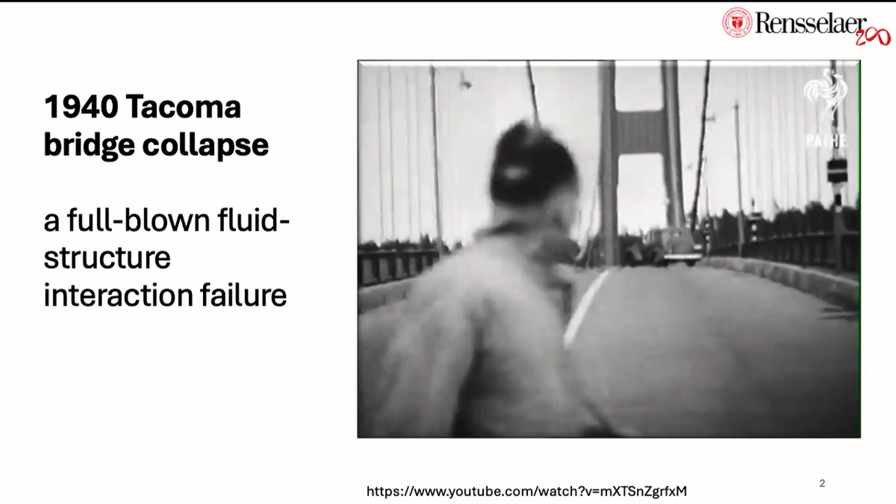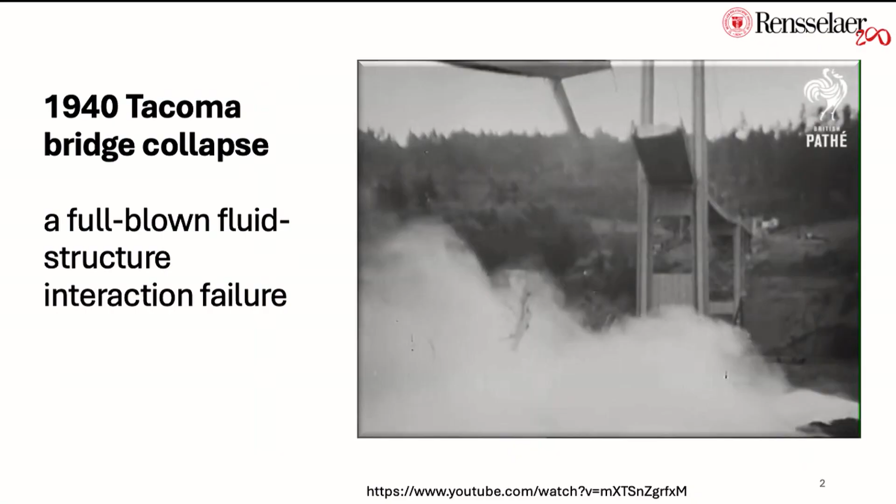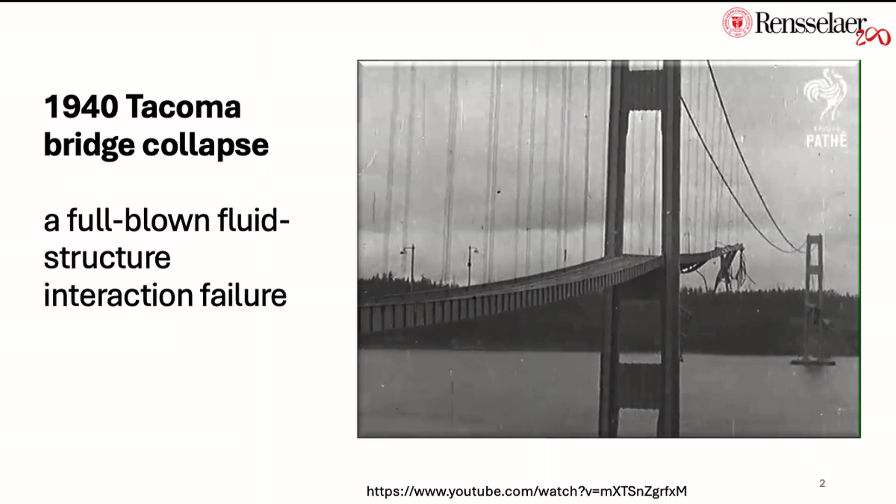many of you, I'm sure, know about the 1940 Tacoma Bridge collapse, and this is a full-blown fluid structure interaction failure. And if you know how this all fell apart, you will see it's instability problems, vibration problems, structural failure problems. So, this is a typical example of our everyday life, what we could encounter in fluid structure interactions.

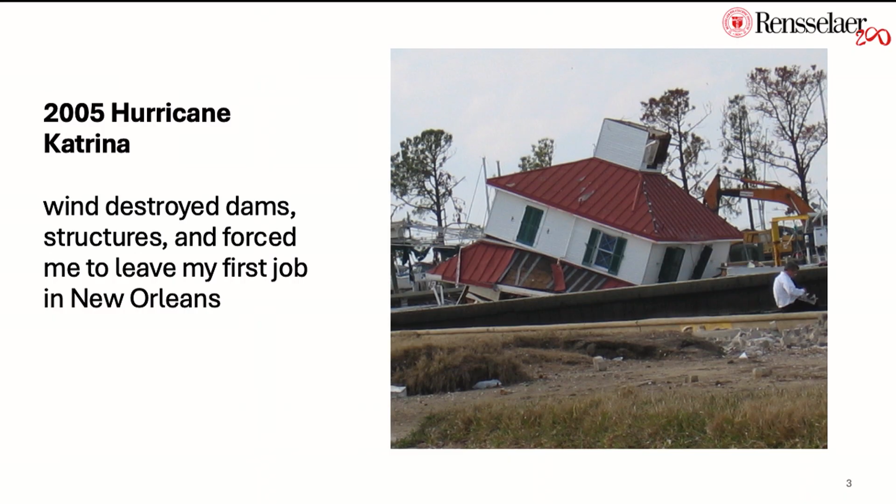And that's me. In 2005, Hurricane Katrina, this is my tour around after the city kind of cleaned up a little bit. So the wind and the flood destroyed all the dam structures, and that was an event that took me to a totally different turn. And so all of those are considered multiphysics interactions because there are fluids, there are structures, and there could be other things that are all interacting together.

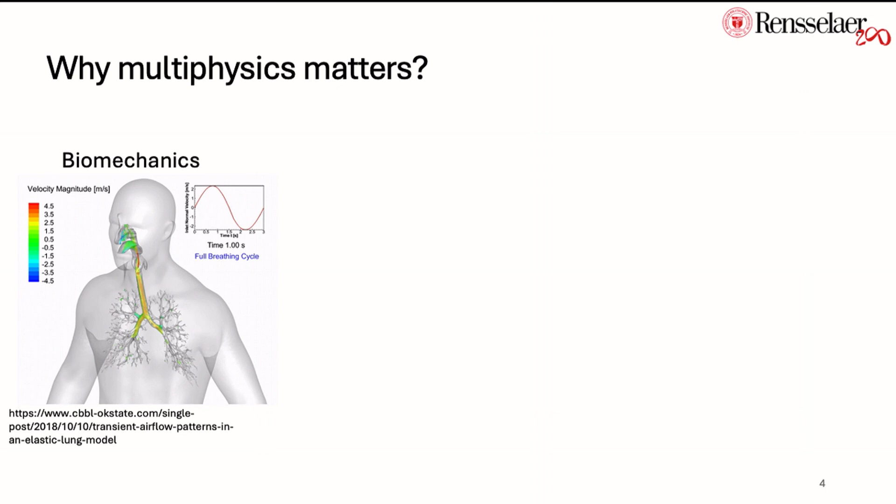So just to kind of talk about why multiphysics matters. Now, why does it matter? We see it in our everyday life. In the biomechanics field, in this particular example, it's the lung interacting, right? So airflow going into an elastic lung, it'll expand, it'll contract. And in energy, you can see that there are wind turbines rotating, and then there will be pressure changes, and then there will be flow changes around it.

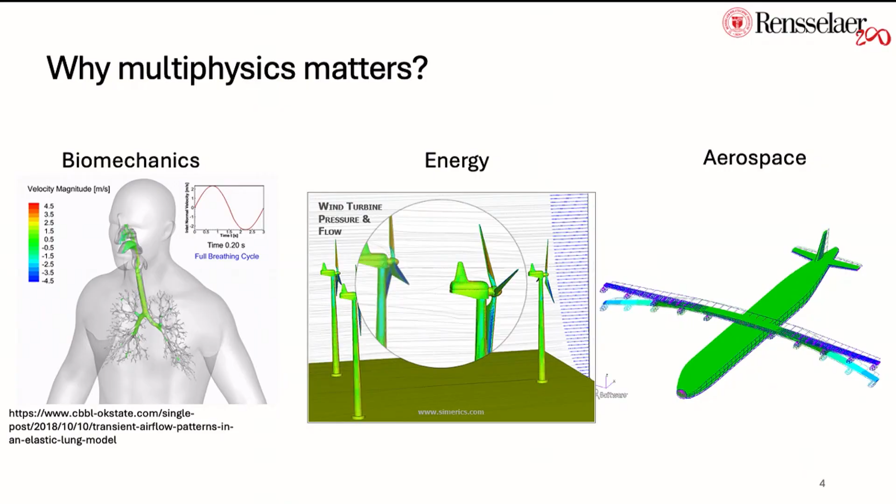Aerospace engineering applications of flapping wings, and we try to fly as efficiently as possible like birds, right? So we try to mimic a lot of nature as well. So multiphysics really matters a lot in our everyday life. And because we're in a computational mechanics conference, just a little bit of history on numerical frameworks that have been out there to simulate multiphysics interactions, to give you a timeline of how everything evolved over the years.

Back in the very early days, the 60s to 80s, that's the original traditional methods development, a lot of numerical methods where we're looking at finite element methods and finite difference, finite volume. It really depends on what physics you're trying to simulate, and there are appropriate computational methods made to suit that particular problem. So a lot of that is really just one phase, let's solve one problem. And then starting in the 80s and 90s, things matured a little bit, and people started to look at staggered schemes where multiple things can occur and interact together.

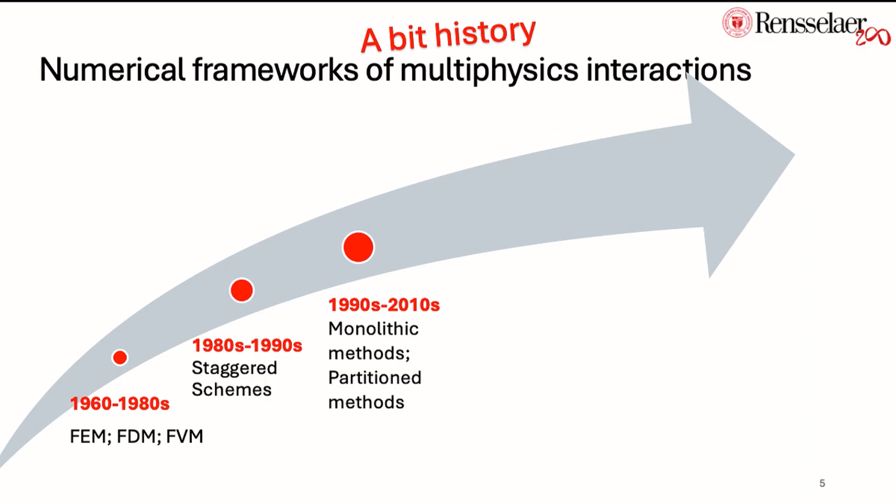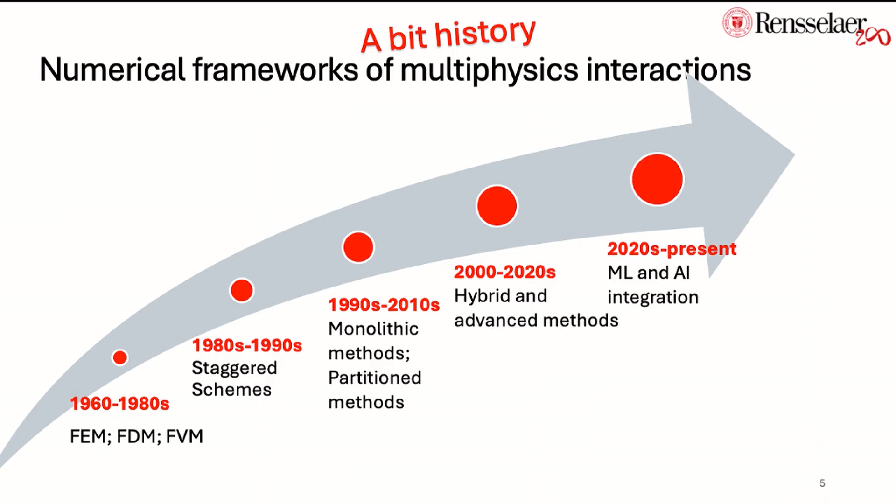And 1990 to about 2010, there are various techniques coming out looking at monolithic methods and partitioned methods to couple problems. And from 2000 to 2020, more recent years, people are looking at hybrid methods or more advanced methods to model multiphysics problems. And of course, that comes into today. Probably half of what you will see at this conference is related to machine learning, AI-enabled methods, all for the goal of making the methods more efficient and more accurate, right? So that's where things have evolved over the years to solve multiphysics problems.

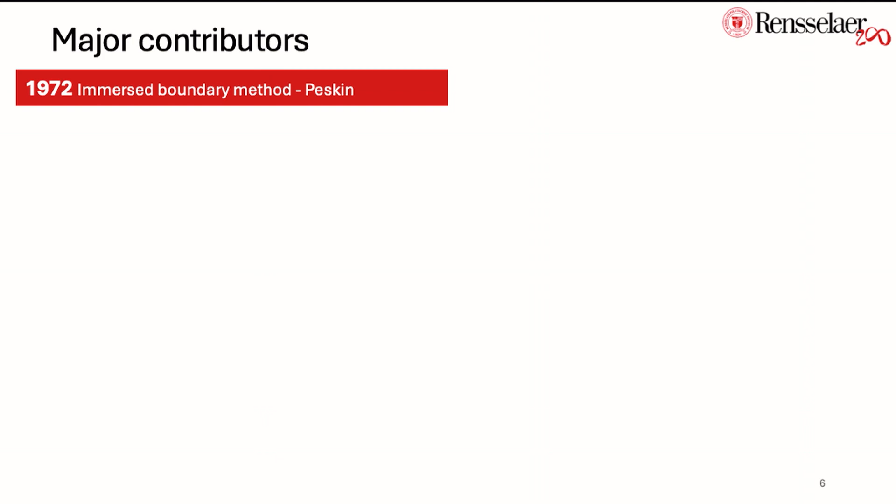So he came up with these immersed boundary methods. And then in the 70s and 80s, there were many other finite element-based algorithms coming out. For example, arbitrary Lagrangian Eulerian had become a standard in many software tools out there. And I'm sure I'm missing some of the key contributors here, but I just wanted to highlight some of the ones that we've been working on.

And then from the 80s to 90s, there are particle methods, and then there are many fluid implicit particle methods and material point methods, lattice-Boltzmann methods, and also reproducing kernel particle methods. So particle methods became very popular and very well developed because they are more flexible. You can look at a lot of large deformation type of solid structural modeling as well as fluid dynamics.

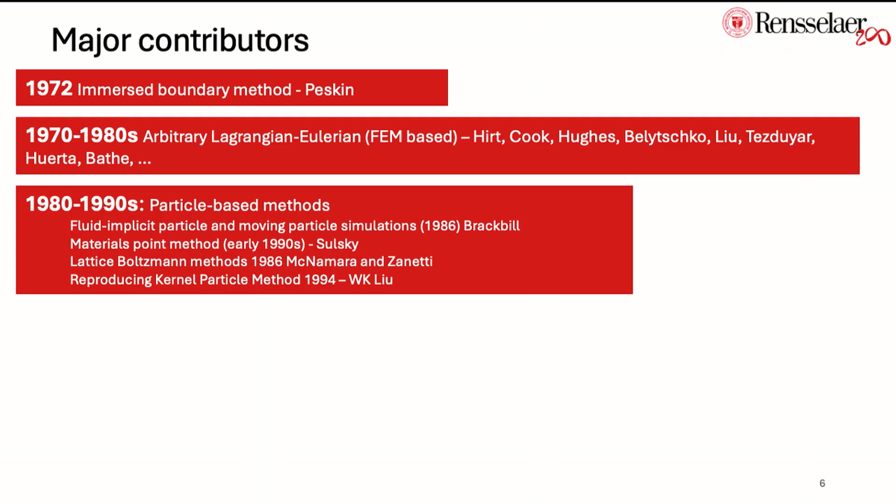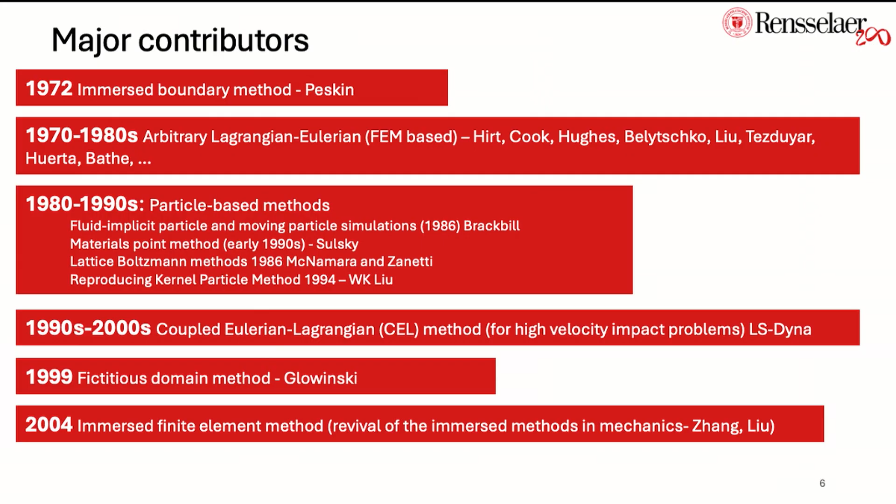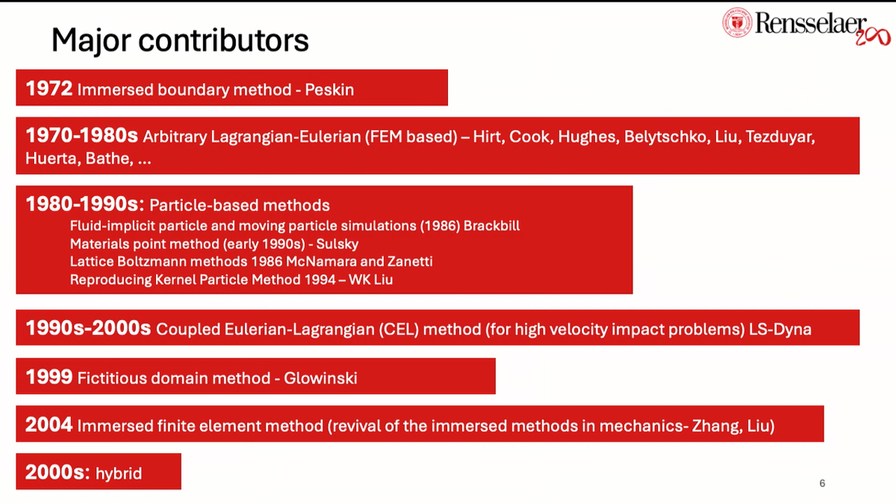So that's a period of time where we were talking with Professor Peskin and saying, how do we really utilize finite element and combine it with the immersed methods? And then we put that together. And since then, there have been many, many different multi-physics coupled methods out there that we have been developing.

So just going back to some fundamentals, taking fluid structure as an example of multiphysics coupling. For example, if I have two phases interacting and coexisting in the same computational domain, what happens? I'm going to have a fluid domain, and I also have a separate solid domain. And they each represent their own physics. For the fluid, I can use Navier-Stokes, and typically this set of equations is modeled using the Eulerian frame of reference.

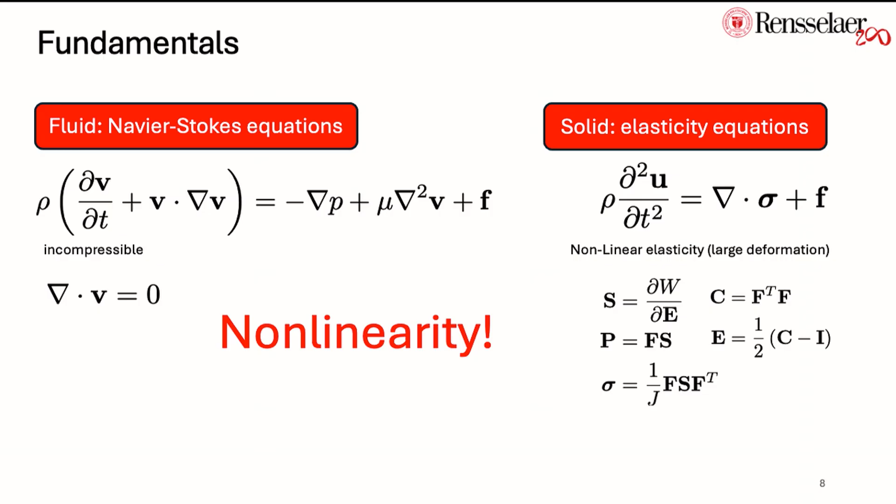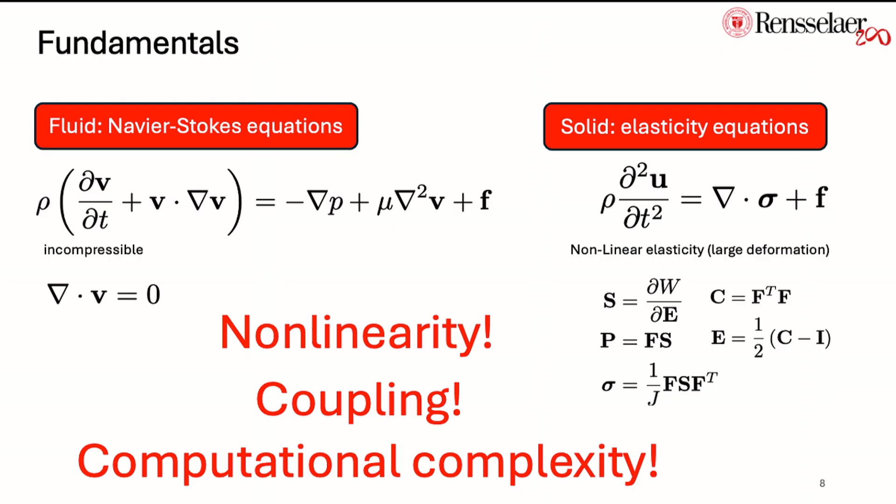And on the solid side, typically we look at an elasticity or nonlinear elasticity framework where we typically use the Lagrangian frame of reference. So now you have two different reference frames coexisting together. So what do you do? What do you do with the nonlinearity? What do you do with coupling? And what do you do with computational complexity? All of these things come together and coexist, so you have to think about how to take care of them, right? Each on their own is already complex enough, but when you put them together, things become a little bit more complicated.

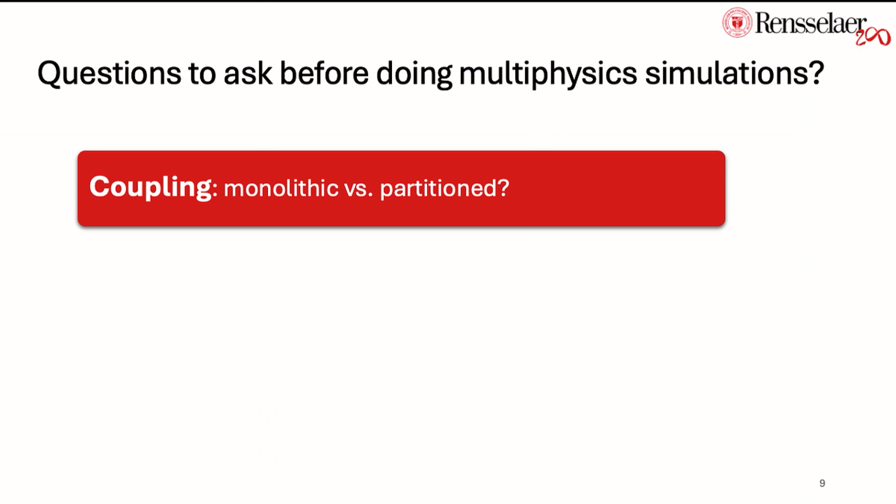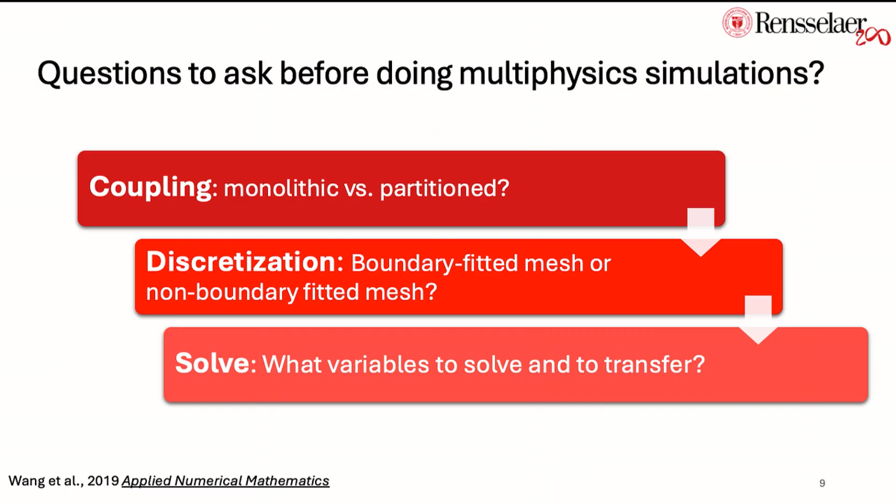So typically when we do computational modeling, the question to ask before you do any of these multiphysics simulations is how do you do the coupling? Are you using monolithic or partitioned methods? How do you discretize it? Are you using a boundary fitted mesh or non-boundary fitted mesh? How do you put the different meshes together? And then how do you really solve it? What variables are you trying to solve, and how is one transferred to another? These are the questions you want to design before you actually develop the algorithm to execute.

So going back to the first question, how do you choose monolithic or partitioned? Typically monolithic ones are the ones where you put the entire system of equations into one. You look at both fluid and structure, you put all the equations into one, and you solve the coupled system for all unknowns together in one shot. So you form this monolithic matrix and you solve all the variables. And that's monolithic. Now, of course, that comes at a price, right?

And partitioned is when you take one domain, solve it, then take another domain, solve it, and then you iterate until they converge to some criteria that you define.

So what are the advantages and disadvantages? For monolithic methods, they provide a stable set of results because as soon as your solution converges, you have a stable result. Accuracy is also very much guaranteed as soon as you're able to solve that coupled system.

But on the other hand, the partition methods give you a lot of flexibility because you're able to capture each one of the domains very well. It can provide modularity, flexibility, and it can also scale really nicely. It really gives you that kind of freedom to do many different things.

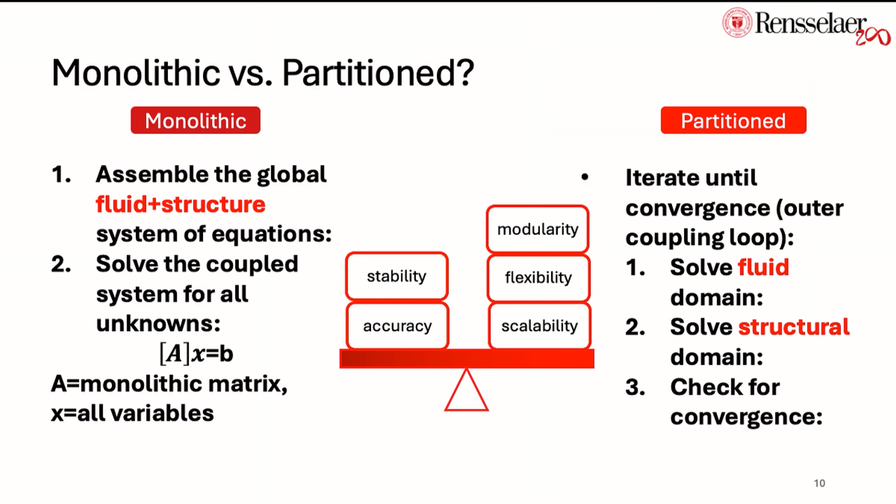So once you decide that, you say: now how do I describe this? How do I physically use a mesh or points to describe this problem? If you have multiple phases interacting with each other, you can really separate into two categories.

One is a boundary fitted mesh. In this case, it's a very traditional fluid problem, like a vibrating cylinder, where one is interacting with another, and everything is meshed into one. This is one mesh describing two phases.

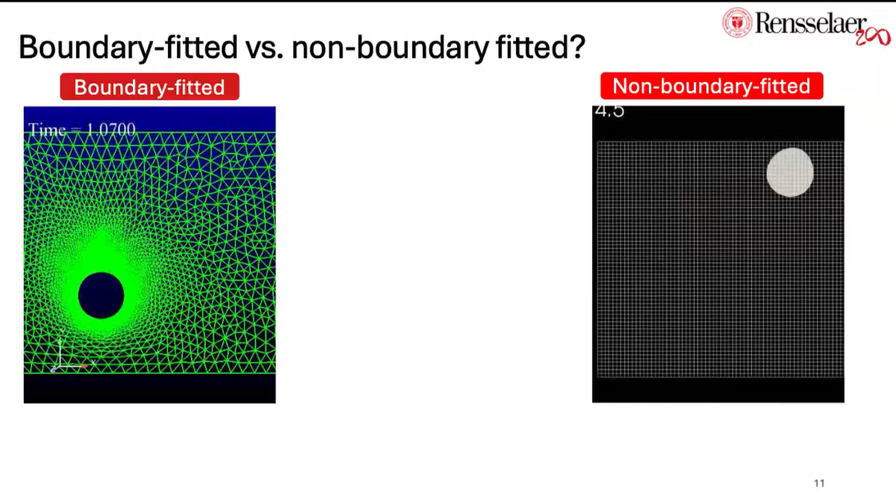And then on the other side, you can have a non-boundary fitted technique where you can have totally separate meshes representing their own domain, one in the background, one in the foreground. That's a non-boundary fitted technique—you can have two separate meshes.

For this one, if you were to put them on a balance—this is, of course, my own personal experience based on the problems we've been trying to solve—I'm going to tip the balance towards the non-boundary fitted mesh a little bit because it's so flexible, so modular. If you can really solve many different parts on their own, you can have different meshes and resolve any problem you may want to resolve in their own domain. So I want to tip that a little bit.

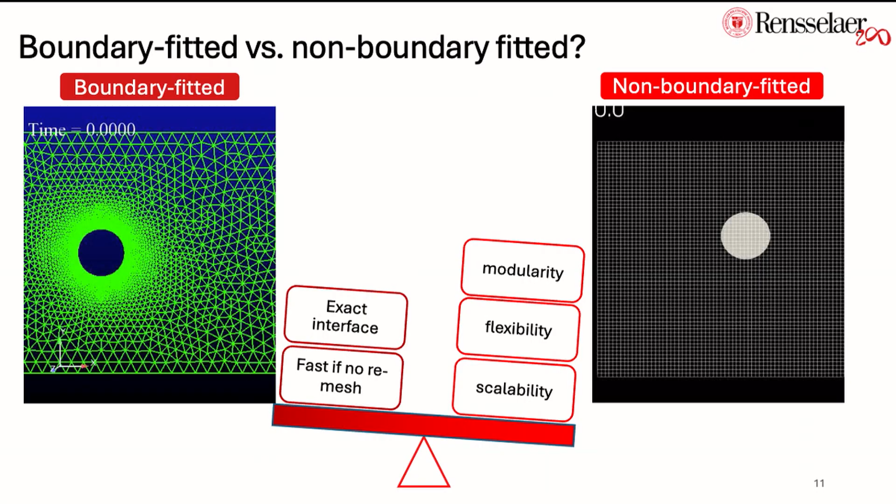Now, of course, the boundary fitted mesh is also fine if you really want that precise, exact interface. It's also fast if you don't have to worry about remeshing. So again, pros and cons, depending on the nature of the problem.

Because our work is mostly related to the non-boundary fitted technique, I want to talk about how everything is pieced together. Let's go from the fundamentals—I don't have a lot of equations here, I promise, just maybe two slides.

Suppose you have two phases coexisting—say one is fluid, one is solid. They don't have to be, but suppose they are. There will be an overlapping domain. Anytime you see a bar here, that means it's overlapping.

In this case, I have a solid structure immersed in a fluid domain. Because the solid is already represented by itself, the overlapping domain you see in the background is the fluid—it's fake, it shouldn't be there. So it should be subtracted.

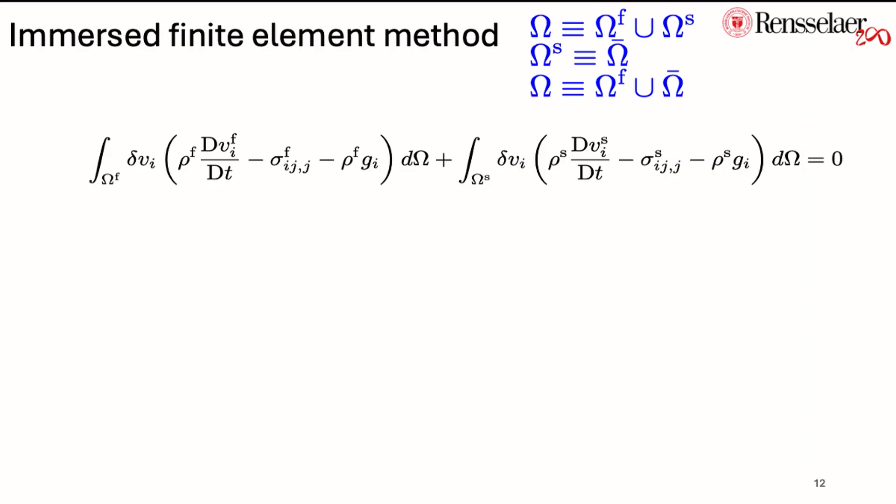The way we go about it comes from the principle of virtual work, from the finite element idea, where you have the governing equation, the strong form, and then you multiply to get the weak form. The first term here is the virtual work done by the real fluid, and the second term is the virtual work done by the real solid. Put them together, and that represents your entire computational domain.

From there, I'm going to manipulate the virtual work done by the solid a little bit. I'll take apart the part done by the background fluid and subtract it from the work done by the solid. So if I were to put the two pieces back together, I'm not changing anything—they still go back to the original term, but here I want to take it apart into the artificial fluid domain and the solid domain.

By doing this, I can start taking things apart by adding these two parts, the real fluid and the fake fluid, together into the entire background fluid. I can only do this if I am looking at the domain in a volumetric sense, rather than the single point sense. That's the major difference from the immersed boundary method.

Everything going on the right-hand side, I'll just call the fluid structure interaction force. You can think of it as residual force. This residual force really comes from the idea that there is a solid existing, or some forces existing somewhere. Of course, if the solid does not exist, or the second phase does not overlap on top of the first phase, then that's all zero, so you don't have to worry about it.

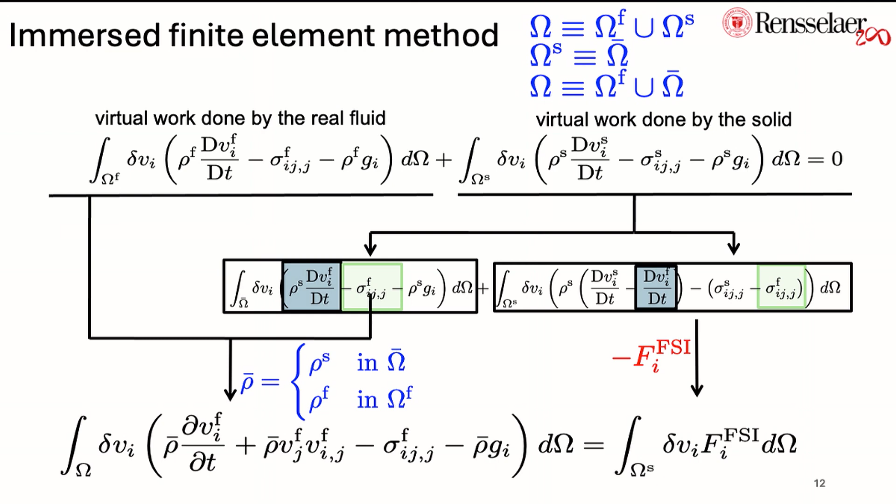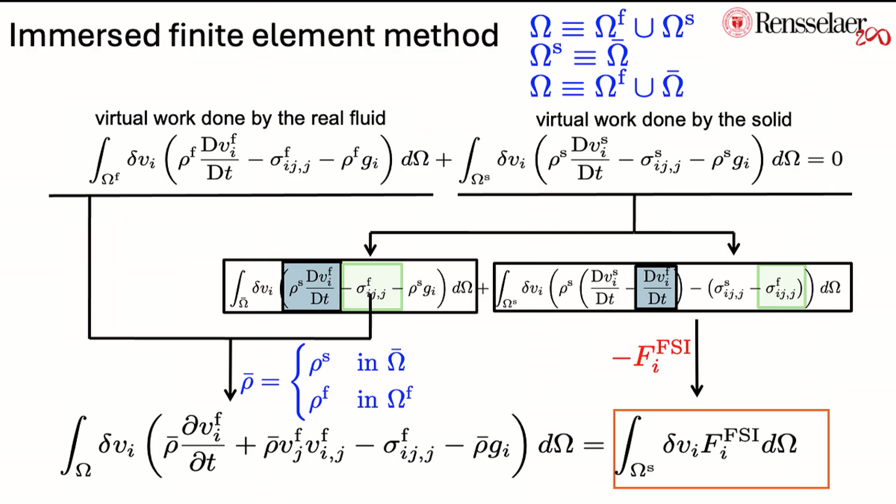By doing this, I come into one big set of equations where the left-hand side is my background, and the right-hand side describes my foreground. That's how I put them together. But everything in the foreground shouldn't just be existing there — there are interactions between the two phases that are overlapping on top of each other.

One condition is the traction boundary condition right at the interface between the fluid and the solid. The other is the no-slip boundary condition. So what happens is I let my background fluid follow wherever the solid goes. This is the reverse of what you've seen in the immersed boundary method, where the solid is always following the fluid.

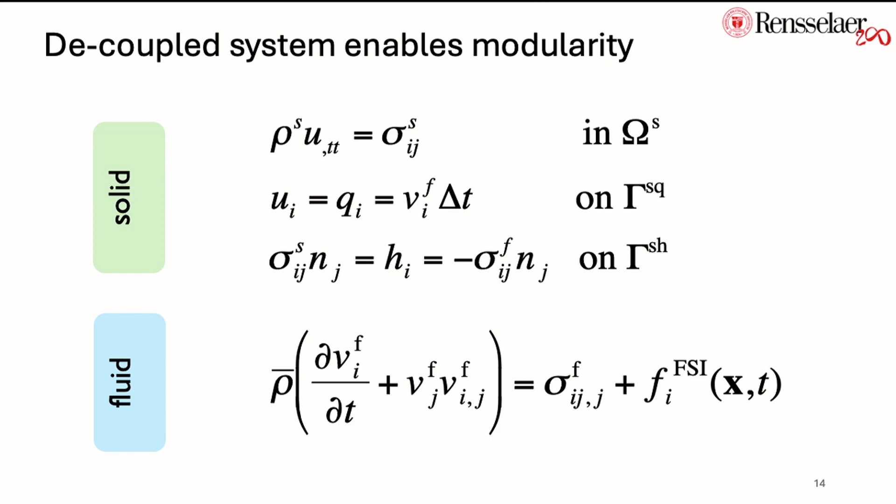What we're trying to do here is make the fluid fake — because it's fake, I can do whatever it needs to do. It follows the solid. That's how the two things are coupled together. If you look at all these constraints at the boundaries and the overlapping domain, and also look at the foreground versus the background, you will see the whole system got decoupled by doing that interface exchange.

Now you can solve the solid using whatever method or reference frame you want. Typically you can just take a Lagrangian code and use it, and for the fluid you can use an existing Eulerian code. For Lagrangian, you can use finite element; for Eulerian, finite volume or finite difference. It really does not matter at this point, because all you need to take care of is that interface.

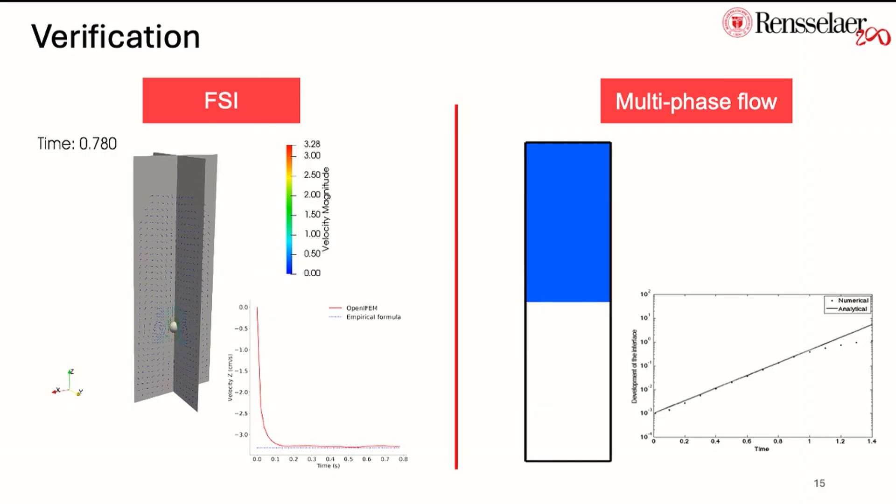Over the years we also played around with some extreme cases, and some simpler cases we tried to set up as verification cases. One of them is looking at a fiber — you can think of it as fibrous material or biomechanical fibers in a fluid, looking at how they behave, how they flow. This is a typical case with a pretty small Reynolds number, like 150 or 200.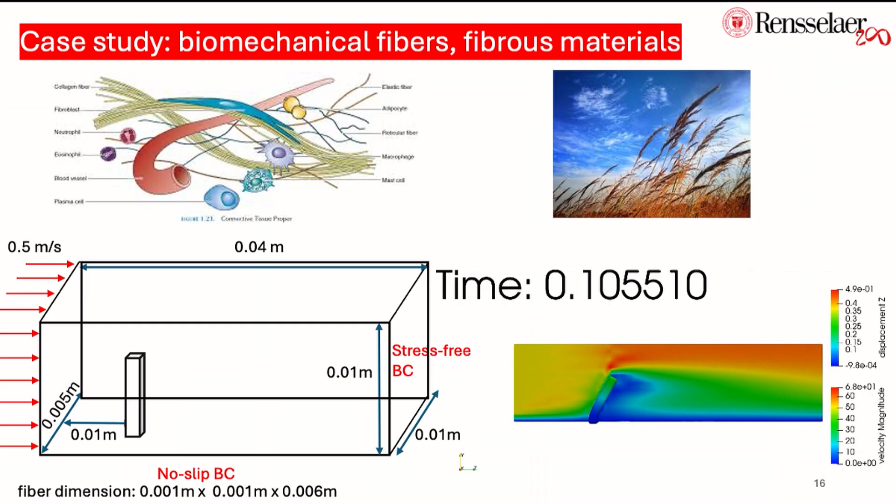So flow passes by a three-dimensional fiber, and you can see how it deforms, and how the fluid domain gets partitioned by the pressure — as it bends over, the pressure gets partitioned into the two domains. Here's another case where we're looking at splashing.

You can think of it as inkjet printing, agriculture spraying, splashing, or coating type problems, where you can have a droplet splashing onto a free surface. You can see how the surface is responding to that.

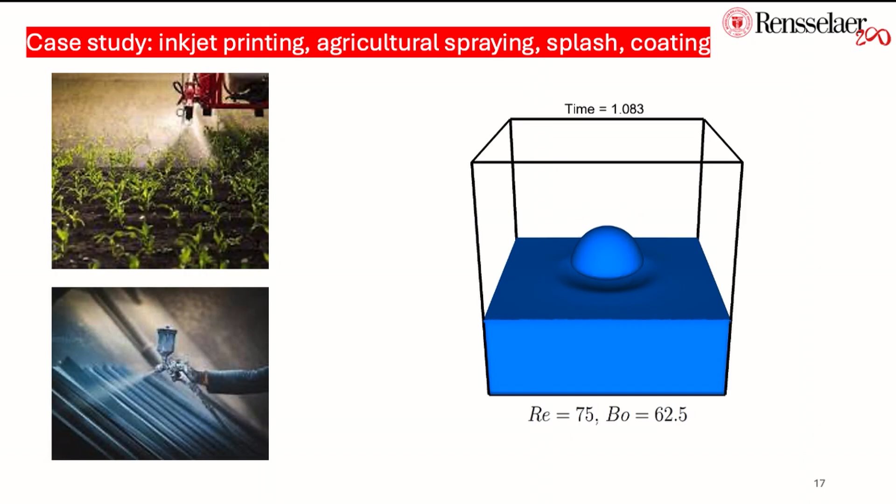We have another case for comparison, showing how they behave differently based on different Reynolds numbers. We also looked at blood drops hitting surfaces.

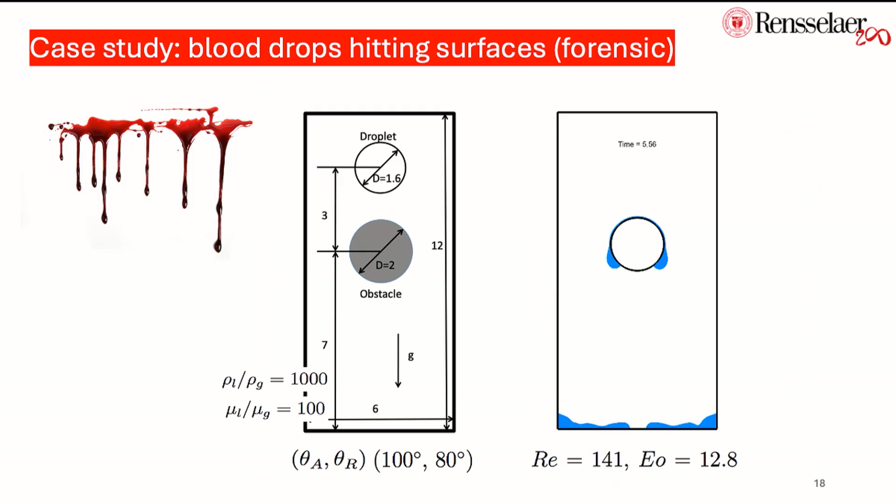We actually did look at forensic studies, looking at how blood drops penetrate into different types of materials using our algorithm. In this particular case, what you saw was a droplet hitting an obstacle, and then based on the free surface and surface tension, how everything impacts onto the surface.

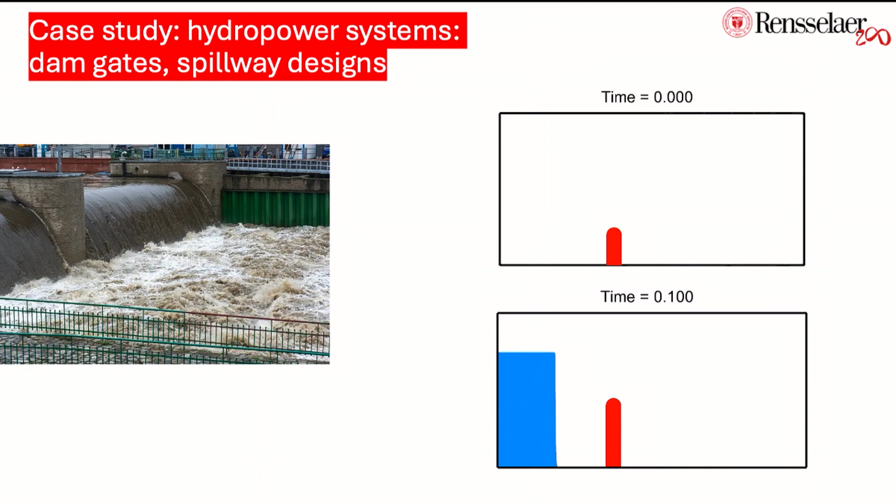Here's another case where we have three phases all interacting together: air, liquid, and solid. Using the way that we constructed this, you can do all sorts of overlapping on top of each other without having to worry about level sets, where with level sets you have to define the boundary values for the different phases. For us, everything is layered on top of each other, and you can represent however many phases you want.

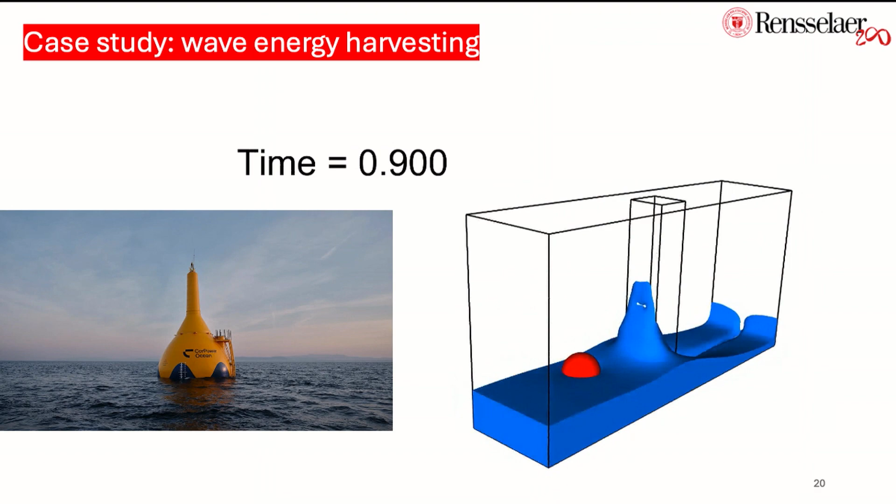In this case, it's wave energy harvesting. You can think of it as like a buoy problem. You have a free-flowing water column hitting a ball, then hitting an obstacle, hitting onto another wall, and then it comes back. A lot of engineering applications there.

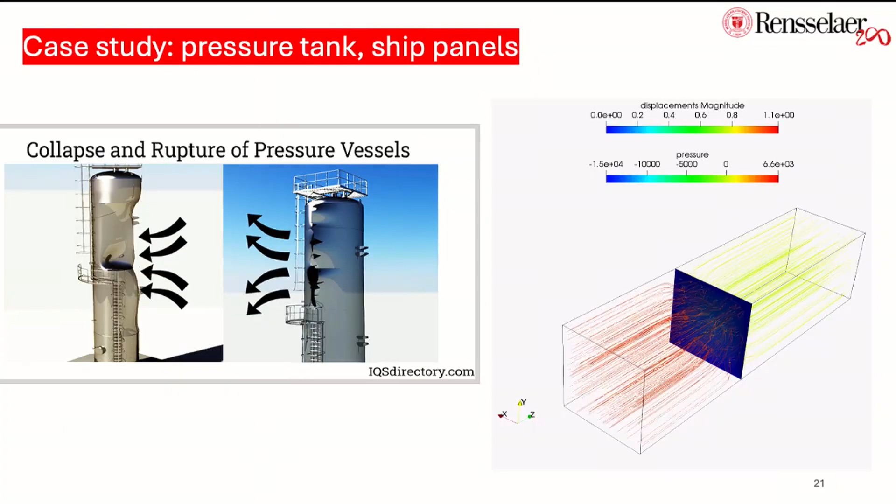This is work we started with our Sandia collaborators, looking at pressure tank or ship panel type examples. In this case, that's actually a shell representation rather than the actual solid. So you can see a flow - could be air, could be liquid, could be high speed - pushing that panel forward and starting to deform it. You can see how it partitions the pressure into the two parts. This one is actually a very difficult problem because the entire thing is sealed through.

This is another case where we're looking at a biomechanics problem - the phonation problem, human phonation, where vocal folds vibration and glottal jet aerodynamics all interact with one another. In case you're not familiar, as we're talking we have a pair of vocal folds made of three layers of biotissues, and they all have different properties.

As lung pressure pushes through, the air starts pushing these vocal folds open. Then the elasticity of the vocal folds makes them want to close again, pressure builds up, and eventually the cycle restarts. This one cycle is the hertz we're talking about - the frequency of the vibration. For a female voice, it's typically about 200 hertz. For a male voice, it's somewhere around 100 hertz. The frequency of this vibration really characterizes our phonation.

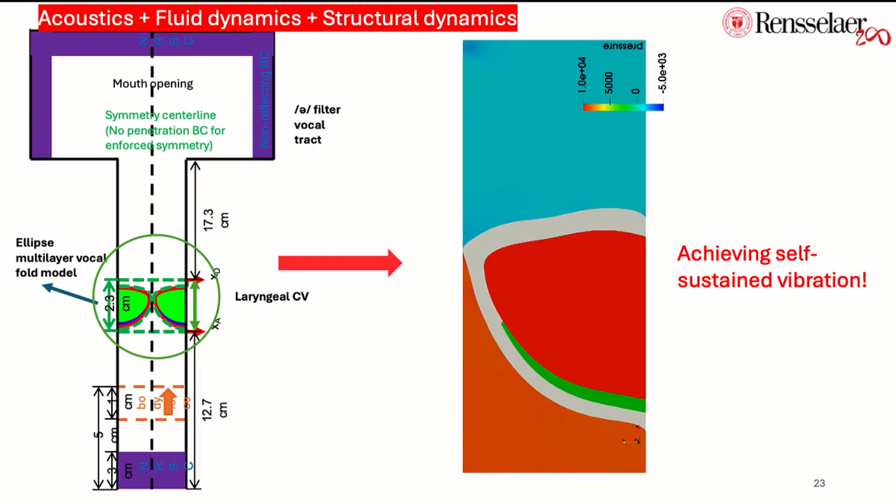So that means we're not manipulating how the vocal folds are behaving. We're not manually closing down the gap. It just opens and closes on its own, and we can do this for hundreds of cycles. So this is a pure acoustics, fluid dynamics, and structural dynamics problem. Very, very complicated. And of course, as I mentioned, the reason we want to do this in the first place is to be able to capture the efficiency of sound.

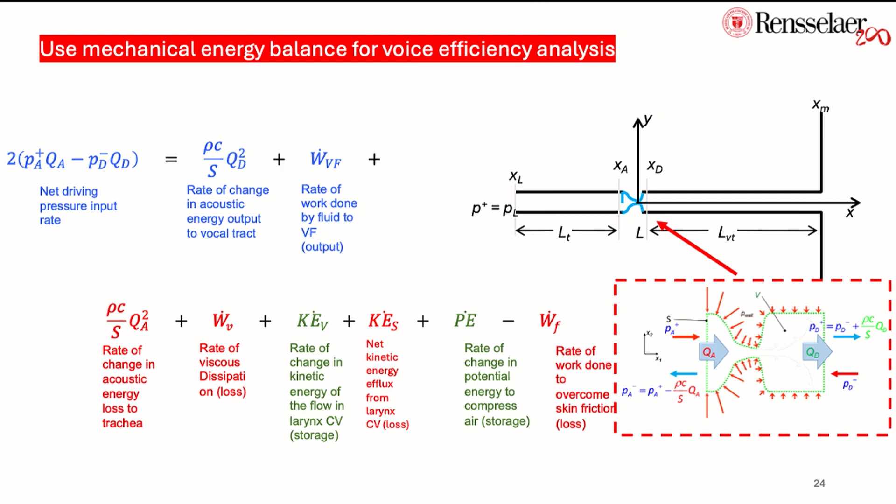And then we went back to textbook fluid dynamics 101, back at the undergraduate level. And we said, what is the best way we can capture what the energy flow looks like? And so we partitioned, we used Bernoulli's method. So Bernoulli is where you draw a control volume, you examine every single term and see where's the input and where do they all go. So we drew that mechanical energy flow, looking at the balance of it, in order to evaluate the efficiency.

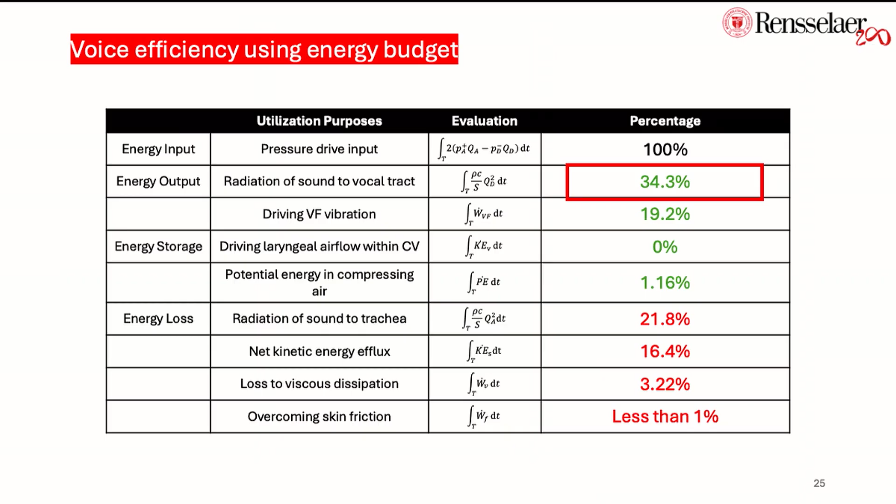So here's what we found out, that for the model that we have, which is a normal, healthy female voice, this one is about 34.3%. Of course, this is very much idealized. And for a real normal human, a 25% efficiency is pretty good. So when you get down below that, you start to hear some trouble breathing, more breathy type of sound. So anyway, that's what we did with this study. We're continuing with different types of voice diseases and such.

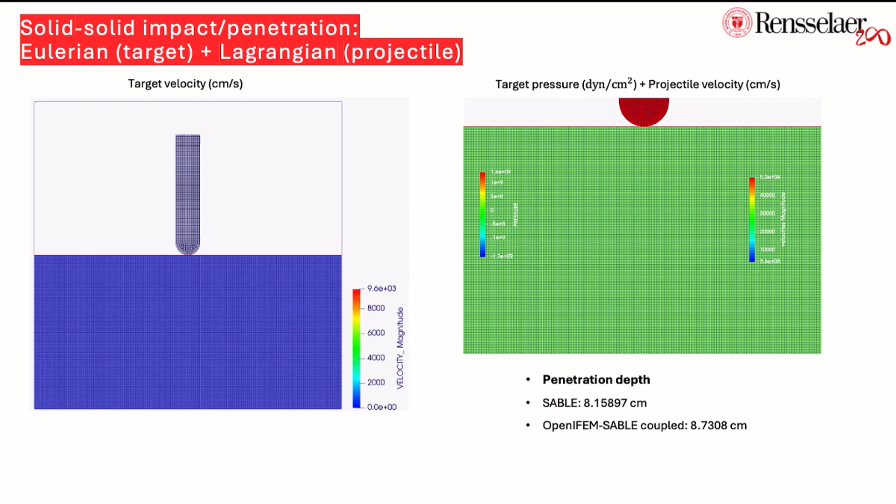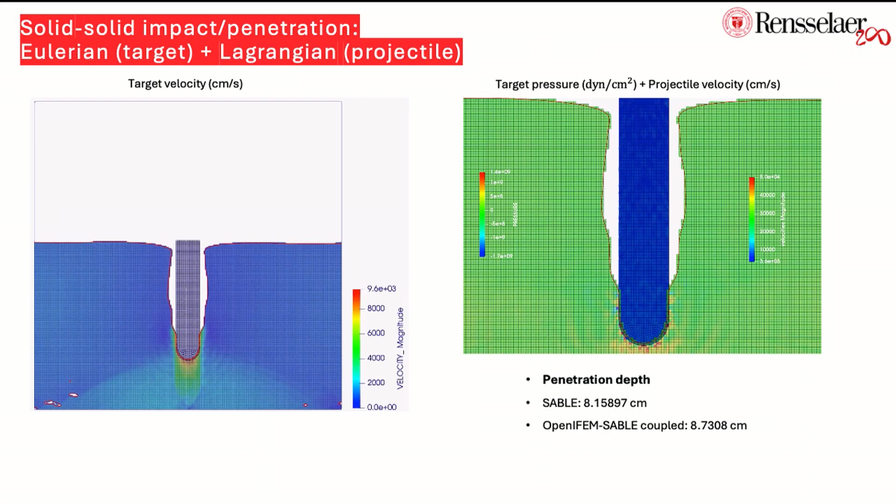So this is an example for the case that we've been working on with Sandia National Lab, looking at solid impact for shock physics type of problems, where we have a projectile, we also have targets, and we used the immersed methods that I mentioned, Eulerian coupling with Lagrangian. And at least from this point of view, everything worked really, really nicely by coupling two entirely separate codes together.

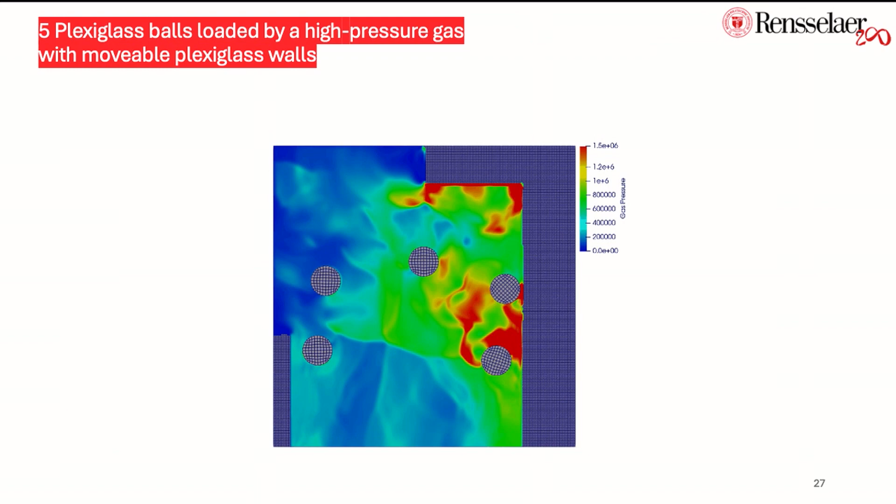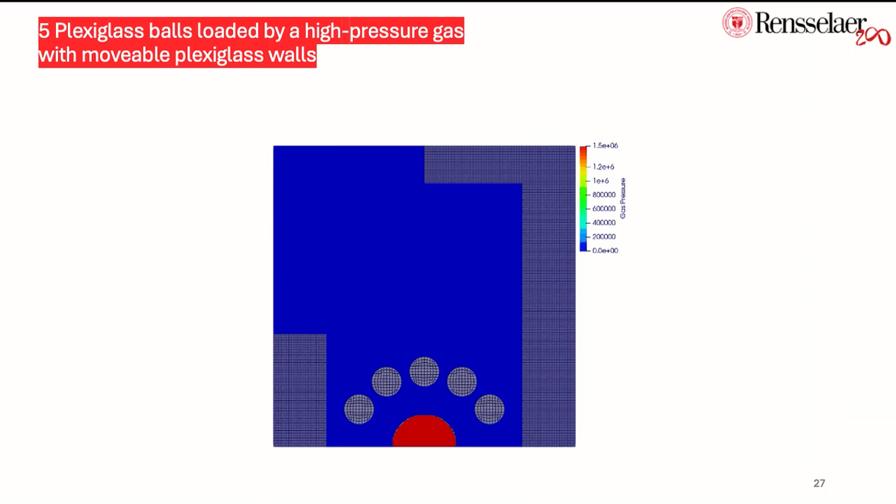And here's another toy problem that we looked at, and this is 5 plexiglass balls under high pressure gas, and you can see how they are bouncing off the walls and then start leaving the frame. So these are very much solid interaction. Of course, the fluid is in there as well. So anyway, that's some of the toy problems that we had looked at.

Now, challenges and opportunities. We have so much work to do. As you all know, if you had ever tried to model a multiphysics type of problem, cost remains an issue. All of these simulations that I just showed don't come out in just minutes; we're not even close to real time yet. So cost remains an issue, and of course some of the solutions you will see at this conference are machine learning, AI algorithms. They will help.

And stability, when you look at coupled problems, stability is still an issue. So we're still looking at different strategies on improving the coupled systems so that at least the users themselves can know what is the stable region and what is not. Accuracy, of course, is still a problem. Adaptive refinement is one solution.

My dad worked on finite elements since 1980. When he retired, he said, I made a conclusion: no matter what algorithm you're trying to develop, you just throw more points at it, it'll always be better. So that was the conclusion of his entire career. And when I was playing with immersed methods, trying to put coupled systems together, I also noticed that if you are able to do some adaptive refinement at that interface, everything just solves itself. So that's that. And then validation.

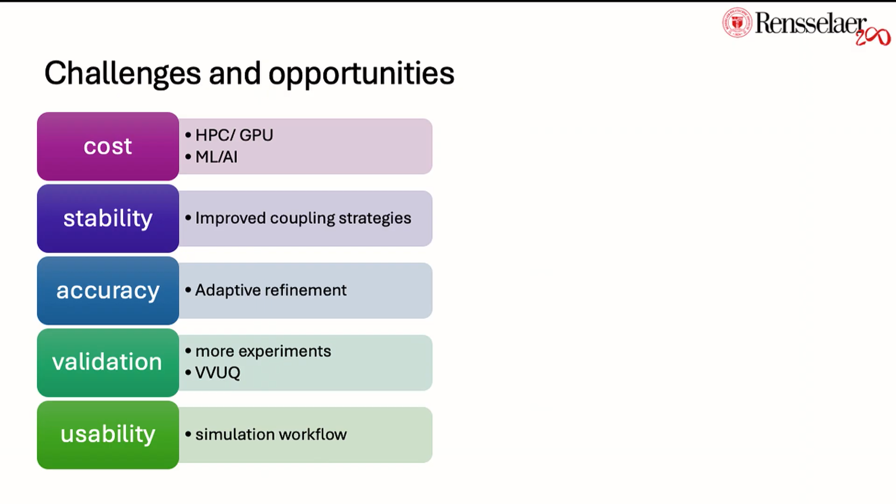And I think there are solutions out there. We've been exploring some tools here and there. It still needs work, right? So there's still work to be done in many different aspects. And I think we're still far away from solving real complex systems as a whole. We're still solving for components.

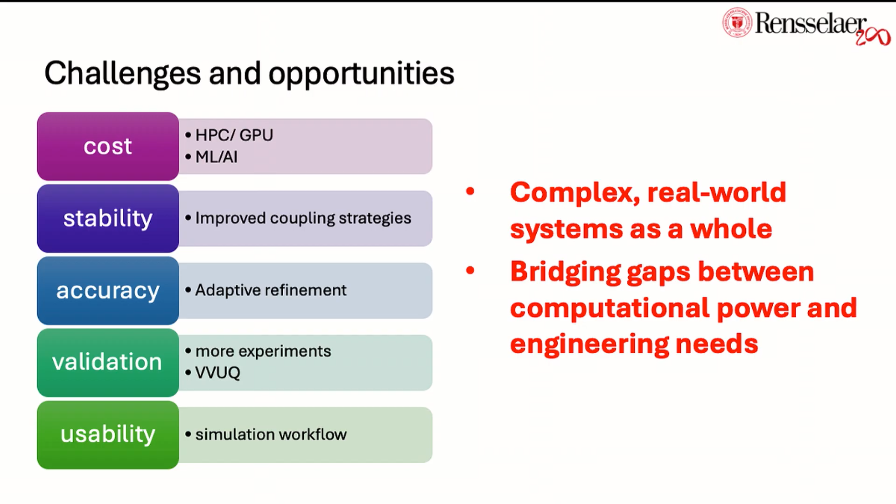When we're looking at a problem, we're still kind of breaking it apart and then solving a small part of it at a time. And I think to actually solve a real system, we're not there yet. Maybe with the speed, with the accuracy, we will eventually get there. And of course, we're always trying to bridge the gap between computational power and engineering needs. That's going to be a continuous struggle, and that's why our field still exists.

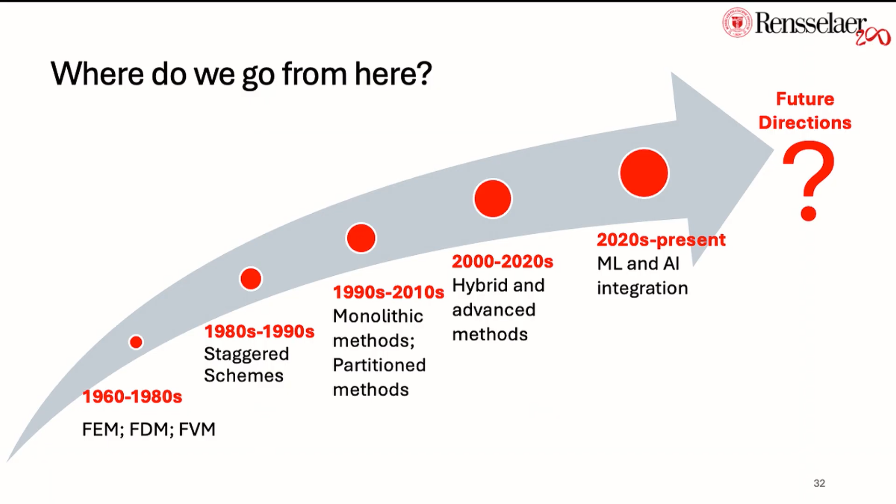All right, so I'm going to leave it here, because I talked about where we have gone over the past decades, and where are we going to go? What is our future direction in the multiphysics coupling realm? I think that's for all of us to answer, and I think we're getting closer and closer to where we want to be, but we're certainly not there yet.